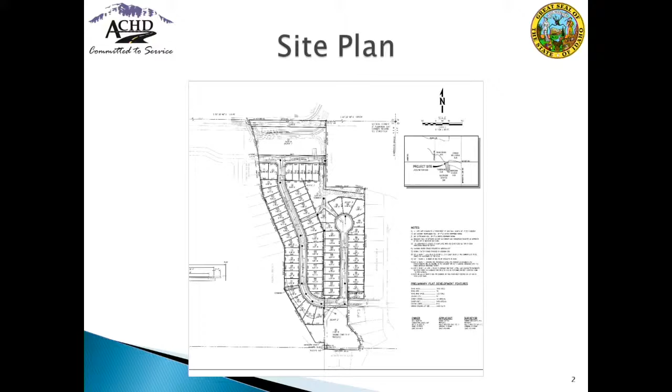Okay, we're up and running. Thank you. Good afternoon, Madam President, Commissioners. For the record, Stacy Yarrington, Development Services. This is a decision briefing, as the applicant has initiated an appeal of staff's decision. This application is for a preliminary plat consisting of 67 buildable lots, estimated to generate 633 average daily trips, with 67 trips in the PM peak hour. The proposed Jocelyn Park subdivision is located south of Victory Road and west of Meridian Road, State Highway 69.

This site has approximately 455 feet of frontage on Victory Road. Victory Road is a minor arterial and is improved with 2 travel lanes, 3-foot wide gravel shoulders, and the Ridenbaugh Canal is located along the site's north boundary and adjacent to Victory Road. Sorry, my glasses are fogging up.

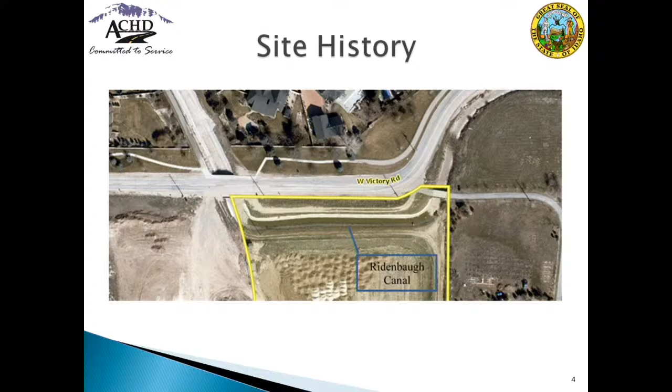The applicant is appealing the staff level decision to require the construction of sidewalk on Victory Road abutting the site, and submitted their request to appeal staff's decision within the allowed 10 working day filing period. ACHD policy requires frontage improvements on Victory Road adjacent to the site that includes pavement widening to 17 feet from center line, plus 3-foot wide gravel shoulder, and the construction of 5-foot wide detached sidewalks on a minor arterial roadway.

The applicant's submittal letter suggests that due to very site-specific conditions, including the bend of Victory Road, elevation change in Victory Road along this frontage, as well as the elevated Ridenbaugh Canal bank, the safest solution for pedestrian access in this area is to have pedestrians cross Victory Road at the new entrance at the Timberline Subdivision directly west of the site, so that pedestrians can access the detached pathway on the north side of Victory, which provides significantly more safety for all.

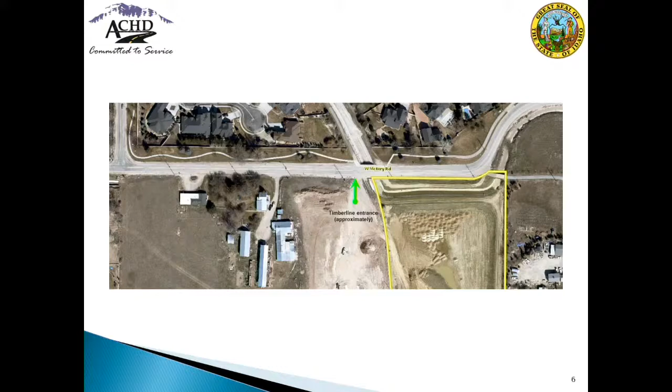As part of ACHD's 2014 action on Victory Middle School, the lack of sidewalk on this segment of Victory Road was raised as a concern. This site is located within the West Ada School District's 1.5-mile walk zone for middle schools and is located approximately 3/4 of a mile from the site.

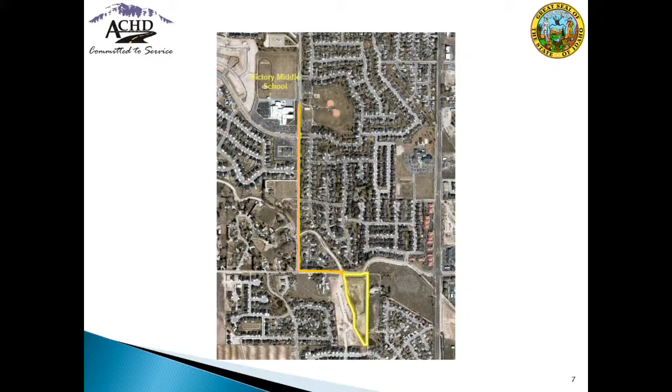At the time of ACHD's action on the middle school application, there was little development occurring on the south side of Victory Road between Linder and Meridian Road. However, since that time, the City of Meridian has extended utilities in this area and has had multiple development applications which have either constructed sidewalks or are in the process of constructing sidewalks on Victory Road. If the waiver of sidewalk is granted for the Jocelyn Park project, there would be a 455-foot wide gap in what would otherwise be almost a complete mile of sidewalk between Linder and Meridian Road.

The applicant's appeal letter stated that this section of the canal— Madam President? Sorry, Stacy. Excuse me, Stacy. Commissioner Baker? Could you go back, please, to the previous slide?

Okay, so the purple indicates existing sidewalk? It is either existing or is currently being constructed. And then the black to the right? Yeah, it's kind of black-green to the right. We've had an application that we've acted on that has a condition to provide sidewalk through their site. So it is a future development to come in. Okay, thank you.

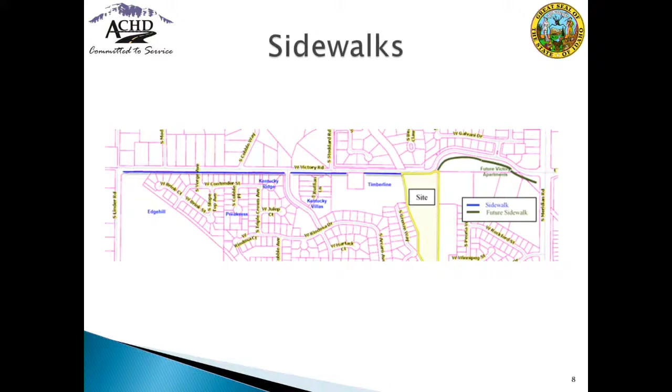Thank you, Stacy. Go ahead. You bet.

So I'll start. The applicant's appeal letter stated that this section of the canal is elevated and therefore standard location and placement of the sidewalk would impact the structural integrity of the canal bank. The plat condition in the staff report required that the sidewalk be located a minimum of 31 feet from center line of Victory Road, abutting the site, consistent with district policy.

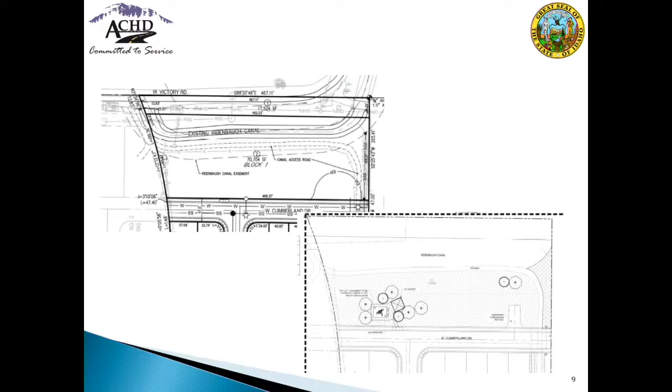The applicant approached the Nampa Meridian Irrigation District to locate the sidewalk within their easement. However, the irrigation board denied the applicant's request. There are viable options to allow for sidewalk to be constructed on the south side of the Ridenbaugh Canal, similar to what has been required on McMillan, west of Locust Grove Road, on Lanewood, north of Floating Feather Road, and on Pollard, north of Floating Feather Road. These roadways have sidewalks constructed behind the canals with pedestrian crossings to tie into adjacent and future pedestrian facilities.

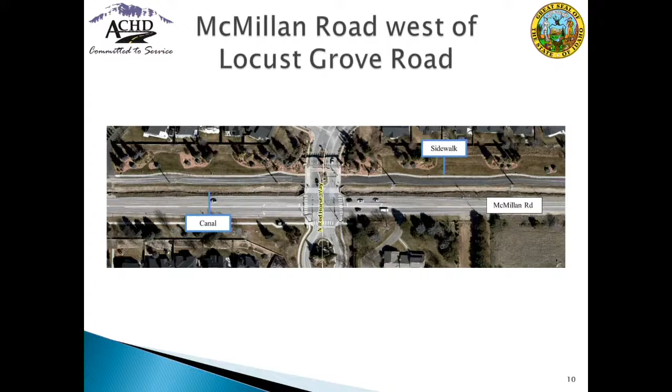This application was heard by the Meridian City Council on September 15, 2020, and during that hearing, the applicant requested a waiver of the city's condition to construct sidewalk on Victory Road abutting their site. City staff recommended the construction of the sidewalk in accordance with the city's subdivision and zoning ordinances. The City Council recognized the importance of having pedestrian facilities in this area and tabled a decision on the application until October 20th to allow time for ACHD to take action on the applicant's appeal.

If improvements are not required with this development, then ACHD will be responsible for the cost of these improvements in the future. In discussions, the applicant was amenable to providing a road trust deposit for sidewalk on Victory Road. However, Victory Road is not scheduled in the integrated 5-year work plan and is listed in the 2020 CIP to be improved between 2031 and 2035. Road trust deposits may only be held by ACHD for 10 years, and if the improvements are not constructed, the funds are returned along with interest to the developer.

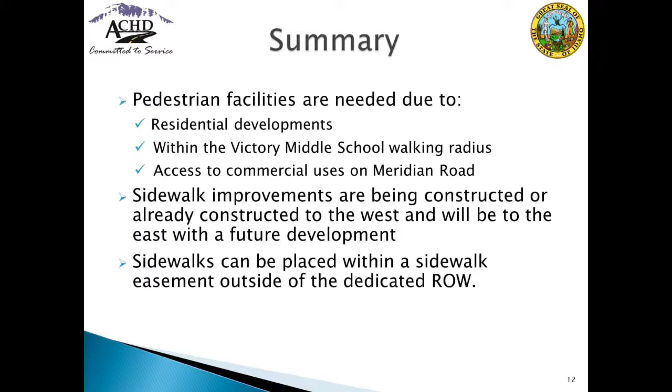Staff is not supportive of the waiver of sidewalk on Victory Road because of the need for pedestrian facilities due to residential developments, the Victory Middle School, and existing commercial uses along Meridian Road. Sidewalk improvements are being constructed directly west of the site and to the east with future development of that site. Thus, it would create a gap along this section of Victory Road, and sidewalks can be placed within a sidewalk easement outside of the dedicated right-of-way. Staff recommends approval of the staff report as written, requiring the construction of the 5-foot wide detached sidewalk per policy. And I stand for any questions.

Madam President. All right, thank you very much. Commissioner Goldthorpe. Yes, I just have a comment for Stacy and for the development services staff that worked on this. And that's just thank you. Thank you for not creating another sidewalk gap in this county. That's all.

Thank you, Commissioner Goldthorpe. Any other comments or questions for Stacy, Commissioners? Madam President, I have a question. All right, Commissioner Hansen. Yeah, thanks, Stacy.

What are the lane widths driving along that, especially heading eastbound? What are the lane widths of the 2 lanes of traffic right now, and what they will be once the pavement's finished after this widening? President May, Commissioner Hansen, currently there's about 24 to 25 feet of pavement there, so the 2 travel lanes are at least 12 feet wide right now. The applicant will have to widen their side of the pavement to 17 feet from center line, and then the MSM plans for a 3-lane roadway through that section in the future.

Well, that was my question. Is 3 lanes really necessary if there's no place to turn? So it's not really a turning lane because there's no place to turn until you get to that development a little further down.

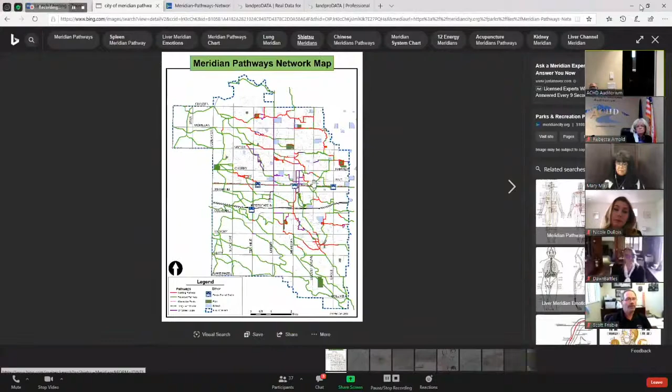And as you see, this bend in the road and the concerns. So initially when we did the project and in the planning process, we said, okay, let's get... we're connecting through the adjacent site. Pardon me, let me get to my info. I apologize, my share screen keeps jumping up in front of me here.

As you can see from the image on the screen, this is the Timberline subdivision that we're taking access from. Our access is actually off of Victory through this entrance here. I did want to note that in one of the previous images Stacy presented, it looked like the arrow was showing access would be here, but it's actually shifted farther to the west.

As you're aware, the requirements are to have frontage improvements. That being said, this image, which I have included in our request, shows that if we were to place the sidewalk where it's typically required, we would be cutting into the bank of the canal. This dashed line is the toe of the bank.

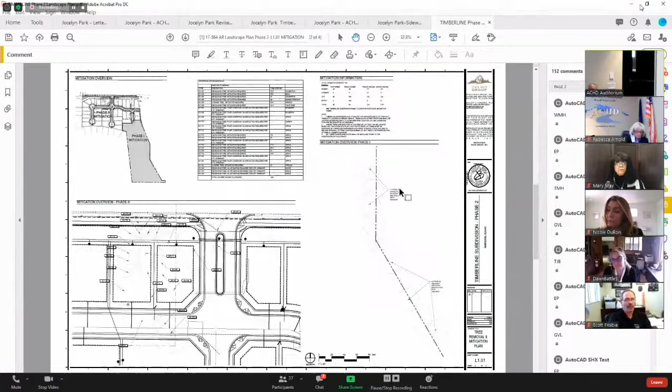We could potentially put the pathway along here in our park, outside of the toe of the bank. Here's a public park area we have that could continue through for maybe some future connection. But that being said, looking at what Timberline's subdivision had been approved to do, we'd still be connecting to a lot. So we've been going round and round on what the different options are.

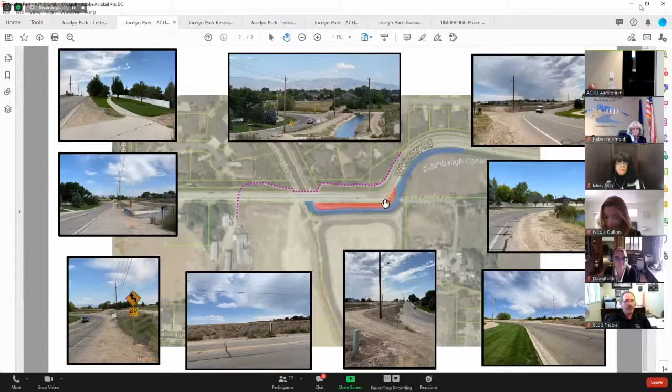This is the area in question, kind of a critical zone. I met with the irrigation district, and they said they see tire marks up on this bank all the time. They felt like they did not want to see pedestrians coming here, and then where do they go? I know Stacy mentioned that the property to the east was to be developed - it's my understanding from city staff that application has now been pulled.

So in looking at how do we make a safe pedestrian access and what options are available, Stacy mentioned our clients have no problem agreeing to a road trust, but it sounds like timing isn't in the cards for that.

We've looked at the city planning for the pathway. They show that the pathway on the north side of Victory is existing. There's a section here that's a little smaller with the sidewalk, and then there's the path that goes up. But there's nothing in their pathway system that identifies anything on the south side of Victory either.

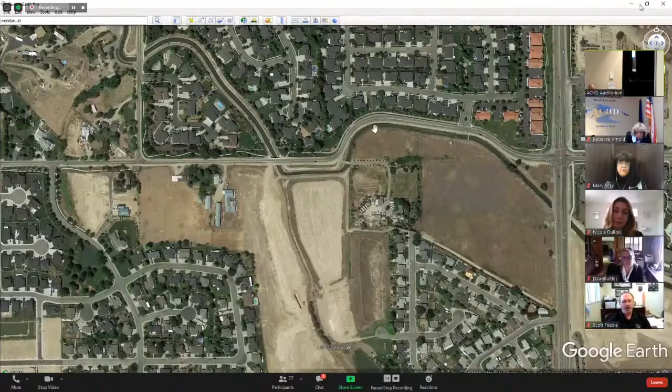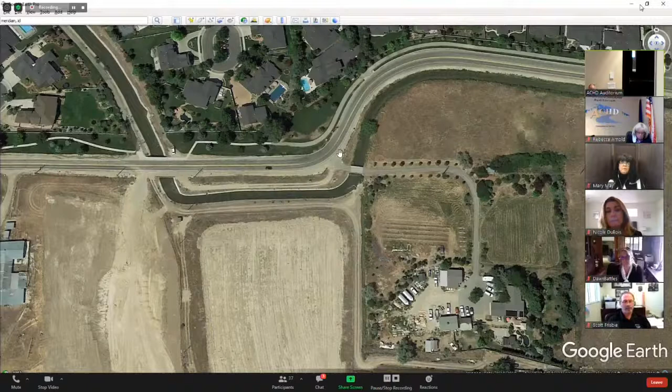And so not controlling this piece, where there's no room, again once you get to this corner, where would they go? Then they get to the end of a sidewalk and they're crossing at a low point that's a blind - potentially not quite a blind corner, but a pretty dangerous corner.

If I may, I'm going to play a video that our client shot of the condition, taking pictures and trying to illustrate our concerns here.

Basically, from our standpoint, we're not allowed to put the sidewalks along the frontage - the irrigation district has said absolutely not. So that doesn't really leave us an option; we don't have any control over that. We appreciate that ACHD staff has been trying to work with us to come up with a solution, but it seems like we keep just going around in circles.

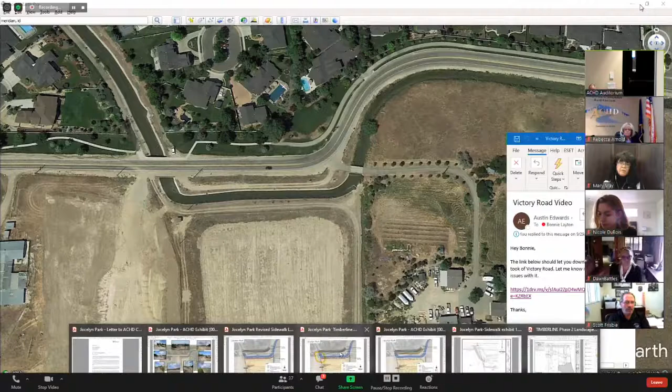While that video loads, I wanted to also show you what we had proposed. Why don't we shift this where there's no drop down here, so why not cross here and really maximize the use of infrastructure that's already in place, pedestrian infrastructure that's maybe underutilized.

I didn't see anybody walking out on this side, but it's off of a busy road. It's not near an attractive nuisance. I'm sorry, the video's taking a while to load, but you can see from the pictures here, as you're coming from the top, you get down into this low corner.

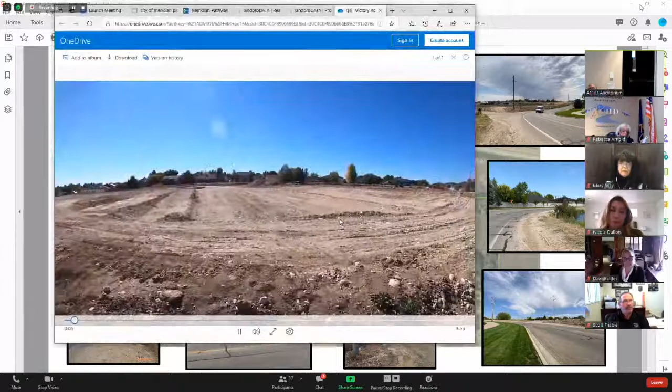Okay, the video's loaded again. So this is the Timberline sub that's being developed. It's looking north on Victory. Now we're looking to the east. Let me try to turn this video down a bit.

But here's where the entrance would be, and then as you go down, you're going down into this low corner. So you'd be pinning, even if we could do it outside of the toe of the slope, which I don't think is possible, you're really forcing pedestrians into a dangerous corner there.

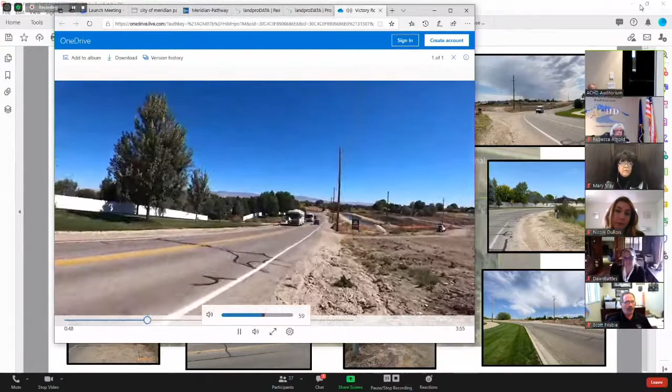And as you may be aware, the traffic on this road is constant. If I'm a mom walking her kids or a stroller down the sidewalk here, and I get to that corner, then what do I do? I've got to turn around. There's no safe place for me to go. When I went out there, I took some pictures, and it was exactly that.

So we asked the irrigation district, can we do something on the top of the bank? We offered to fence it, make it safe. The answer was no. So we're really struggling with what kind of alternative we can provide. If we don't come up with a solution, you'll effectively have a gap in the sidewalk on this side forever, until the canal is realigned and the road is realigned, and there's no plans that I'm aware of that that's going to happen anytime soon.

And that's where we felt like enhancing and encouraging pedestrians to cross at the Timberline entrance would be the safest option for both pedestrians and drivers, something that's clear visibility, that we can get them to the north side, to this wide path that's safe. At the end of the day, the goal is to move pedestrians in a safe manner.

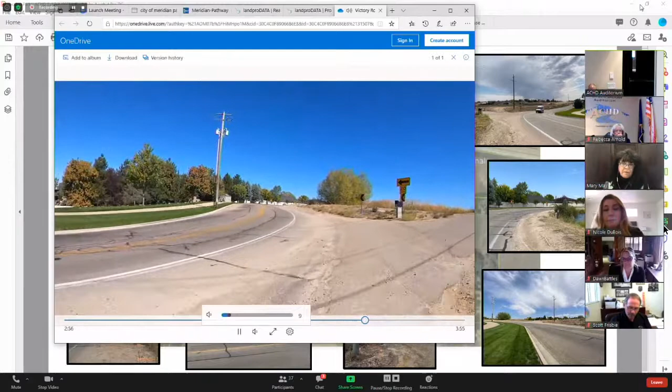I'll just let the video play here. City Council recognized that there was an issue, and they recognized the concerns. We understand, both from city staff standpoint and from ACHD staff standpoint, that they have to follow the procedures of the manual. This is why we're requesting a waiver.

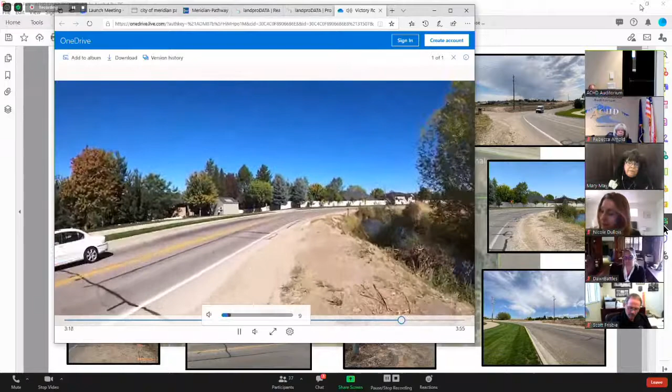So now we're off of our property, and really there's no room here to continue a sidewalk on the north side along the canal. And I guess it's my understanding, Stacy can correct me if I'm wrong, but that previous application to the east of us that's now been pulled, they were going to have a path on the south side, not even adjacent to the road, because there's just no room there with the canal.

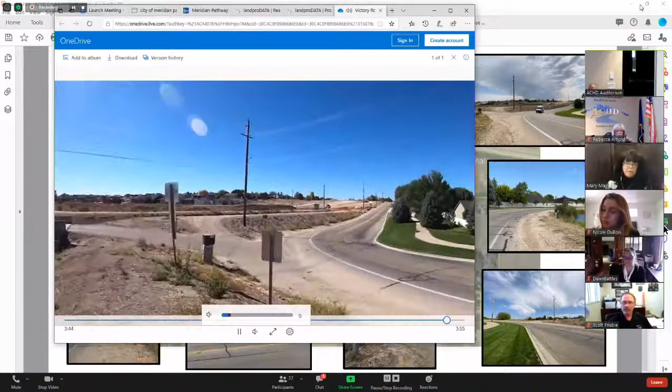So we think that our request meets the standards of a waiver or a variance, given that there's very site-specific constraints and topography here. You can see that the elevation change here from the top of the bank down, you're really in this low corner. And crossing up top, where there's good visibility, where people can get across safely and onto this very nice, beautiful piece of infrastructure, pedestrian infrastructure, would be the best way to go.

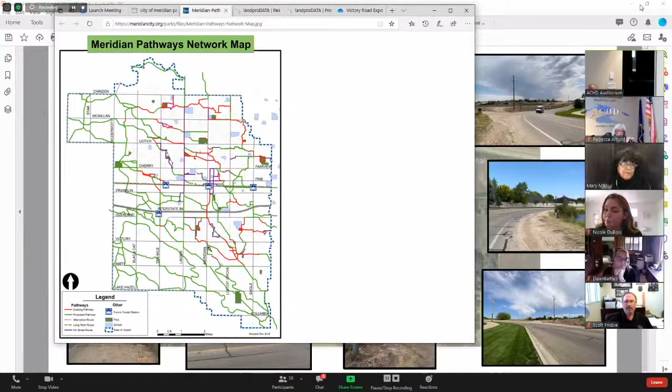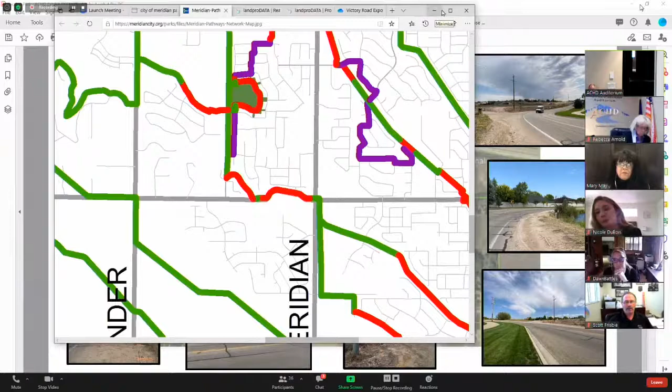It's a very terrible connection. Yeah. I'm sorry, could you repeat that, please? Yeah, maybe you should mute your phone. Yeah, Bonnie, can you mute while she asks her question, please? We're getting a lot of kickback.

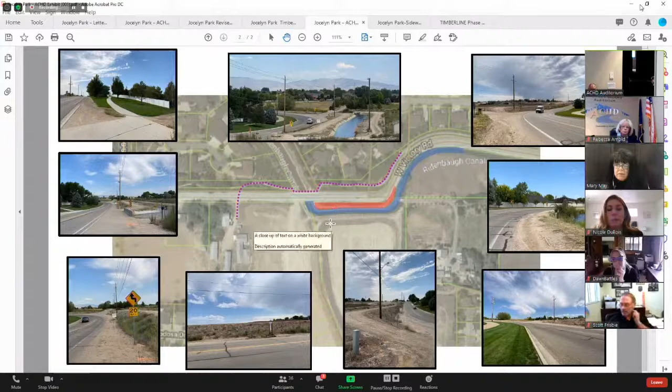Okay, so what's the downside to putting the pathway on the south side of the canal? The downside would be that we would not be able to, we'd have to be outside of the irrigation district's easements. They've been very clear that they don't want anything there. So it would require that we put it here in our proposed park. That said, there would be no way to get to it. Well, you had a thing up earlier that showed you could link to the road, right?

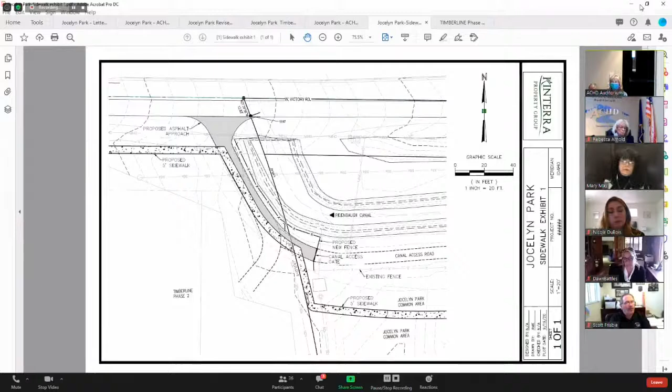No, that's incorrect. What we did was a study trying to show, but it's not on our property. There is a road that you're stepping into, correct? Yes, that is correct.

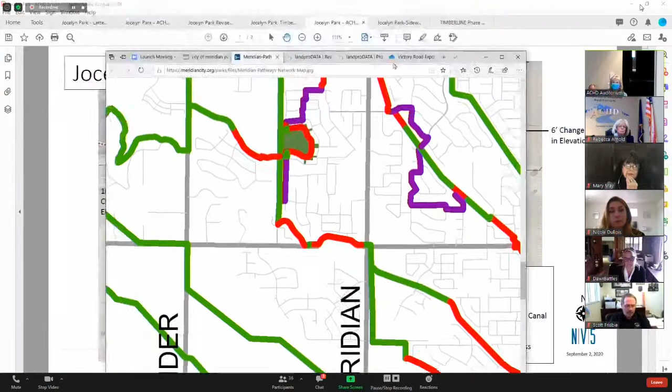Let me get to what we had been proposing. So you have that there. I understand the issue with not being able to be along Victory, but you could connect a pathway from that stub street going north along the edge of the right-of-way for the canal, and then have it stub out to the east of your property.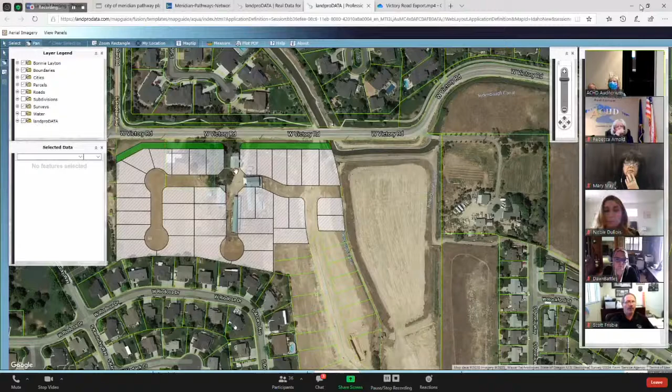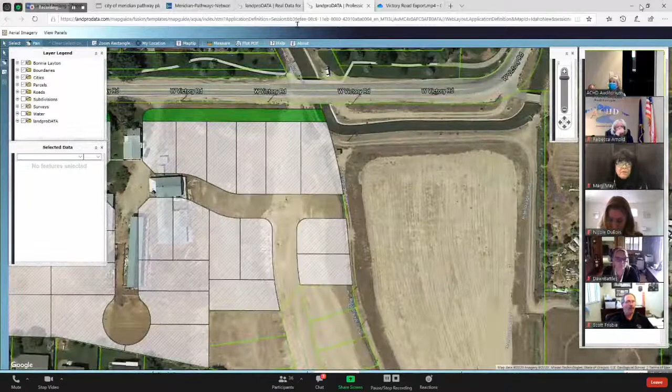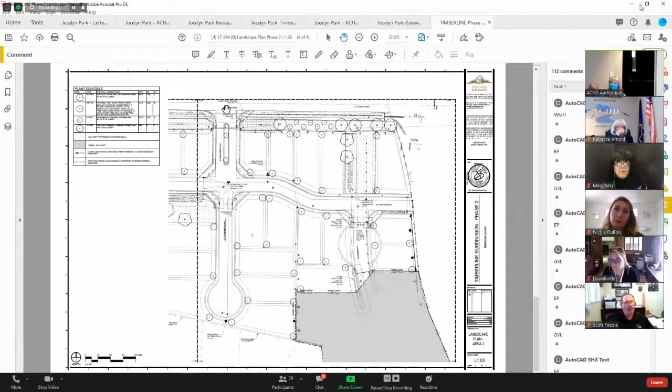Are you speaking from here? That pathway's probably, that sidewalk's already been created, I'm sure. Yes, but let me get to that drawing. So the plan is, here's the entrance, here's the sidewalk. What we have proposed is, why not use this sidewalk and stub in, and then we can bring it along our path. That's what we've been proposing all along, can't we just take access off of that?

Well, I'm just getting from your discussion, I believe it's more a question of not wanting to do any... okay, I don't know if anybody can hear this or not. There's just so much feedback. So that's okay, never mind, I don't need to ask.

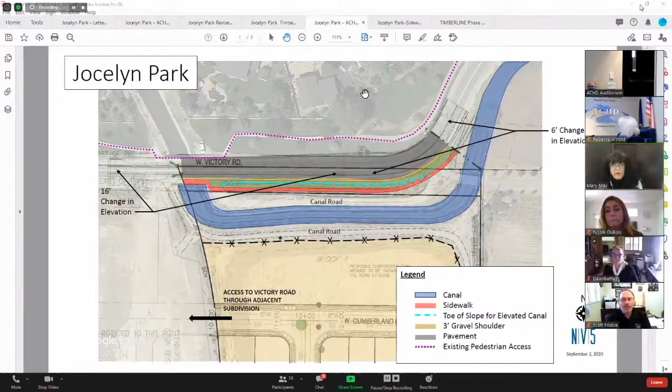Yes, great. My name is Austin Edwards. I gave Stacy my address, but it's 2573 Long Wing, Suite 210, Meridian, 83642, just for the record. I'm on the developer side, and I wanted to say thank you for hearing us today, and I wanted to reiterate and state clearly what our intention is here. We firmly understand the need for connectivity through this area, the need for sidewalk and pathway access, and we absolutely want to provide that connectivity.

I believe that with the access off of Victory Road through Timberline, we can get pedestrians off of this dangerous stretch of Victory Road, funnel them down Cumberland Drive on our frontage where we have a nice open space. We're happy to take a pathway off of that sidewalk and run it down the southern edge of the canal right-of-way, the Ridenbaugh Canal, and stub it at the edge of our property for future expansion on the south side of the canal. I think this area could serve as a great transition for getting traffic off of Victory Road and to the south side of the canal for future expansion towards Meridian. So that's kind of our plan.

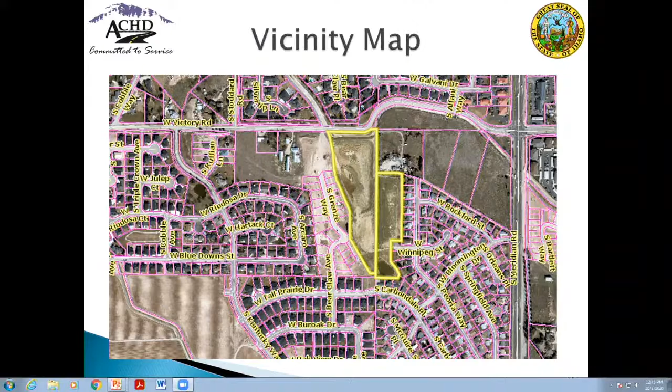Could we pull up that picture that Commissioner Hanson is looking at of the bridge so everybody has it before them? I'm just referring right now to the path on the north side, but we'll face the same issue if we require a pathway on the south side. See, it comes directly to the road and then detaches again right there. So regardless of what we do on this application, I'd like to see us move forward on putting some Jersey barriers or some sort of physical protection on that pathway. We're lucky we haven't had an incident so far.

President May, Mr. Inselman, Commissioner Hanson, something? We will look at that. Thank you very much for bringing that to our attention, Commissioner Hanson. Thank you, Mr. Inselman. All right, Commissioners, any other comments, statements, questions?

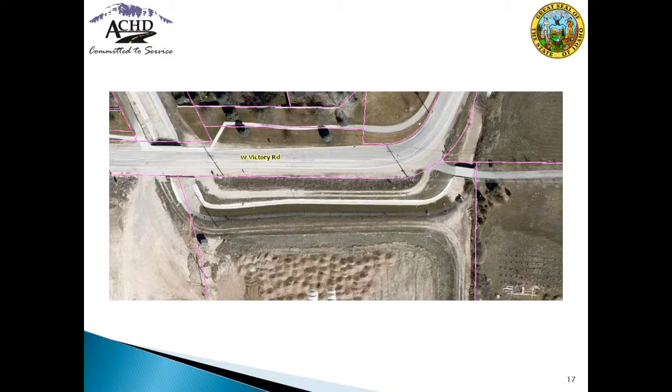All right, we have before us, and you heard the viable option that would satisfy the criteria before us. Madam President, Commissioner Goldthorpe. I would like to make a motion, and that is that we approve the staff report as written and deny the waiver. I'll second that. All right, we have a motion with a second.

Any further discussion? Actually, Madam President, I think the motion should probably be structured as we are denying the appeal and upholding the staff report as written. Agreed. Okay, the motioner agrees. So we have a motion and a second. Any further discussion, Madam President?

Commissioner Goldthorpe? I take great interest in the activities of the irrigation district and their board votes. What has been said about their reluctance or refusal to do anything like this is often a 2 to 1 vote. So I would ask that perhaps in the future the developer and others might pay attention more to the irrigation district than expecting either the city or ACHD to solve problems like this that involve a pathway that will absolutely not be seen by the public, and they'll be more confused than ever to use something that was on the other side of the canal and at the north end of a, quote, park. So again, that's something to consider.

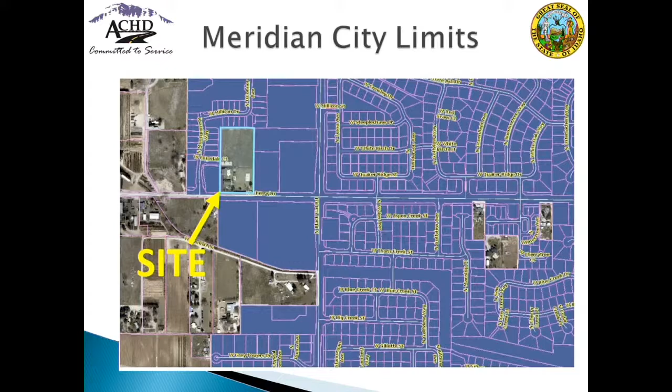The site is located north of Cherry Lane and west of Black Cat Road, between two entitled residential subdivisions within the City of Meridian. This development is estimated to generate 390 vehicle trips per day, with 25 trips in the PM peak hour. The applicant is requesting approval for a master site plan and conditional use permit for a Montessori preschool child care center including 4 separate buildings totaling 3,840 square feet on the southwestern portion of a 5-acre parcel.

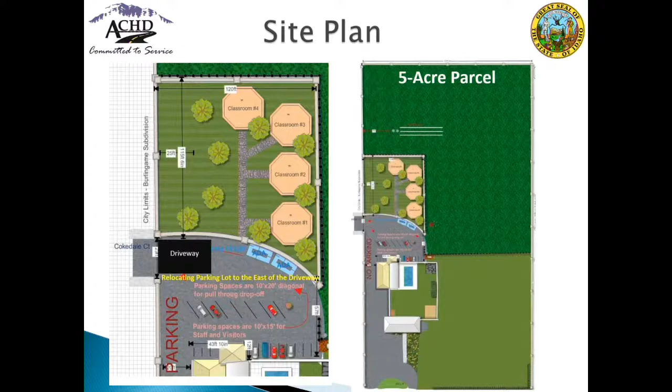The preschool child care center will be expanded in a later phase to include elementary grades, consisting of up to 24 students in each of the 4 proposed buildings, for a total of 96 students at full capacity.

There was a previous application for this site. In 2018, the applicant applied for an accessory use permit with Ada County Development Services for an in-home group daycare facility with up to 12 children. Staff recommended a waiver of frontage improvements in exchange for dedication of right-of-way without compensation. The staff report also stated frontage improvements may be required on Cherry Lane with a future development application. The ACHD Commission approved staff's recommendation to waive frontage improvements with that application.

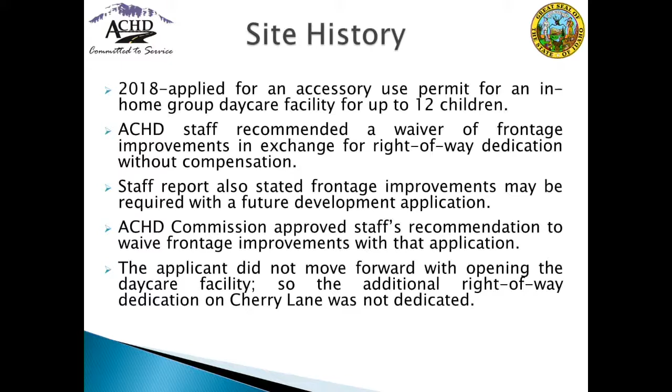The applicant did not move forward with opening the in-home daycare facility, so the additional right-of-way on Cherry Lane was not dedicated abutting the site. The applicant has agreed to dedicate the additional right-of-way as part of this application without compensation, as this portion of Cherry Lane is not listed in the capital improvements plan. Staff recommends the applicant enter into a license agreement with ACHD allowing the existing well and any landscaping to remain until further development of the site.

The applicant is requesting a waiver of the frontage improvements policy as part of the current application. Those requirements include pavement widening to 17 feet from center line plus a 3-foot gravel shoulder where it does not exist, for approximately 125 feet of the site's frontage, and a 5-foot wide sidewalk on Cherry Lane abutting the site.

The applicant's waiver request is based on the following: the applicant personally measured and states there is 17 feet of pavement and a minimum 3-foot gravel shoulder existing along the site's frontage, the inability to use their accessory use permit with Ada County Development Services approved in 2018, and the undue hardship of the conditions of approval to construct a 960 square foot building in their first phase.

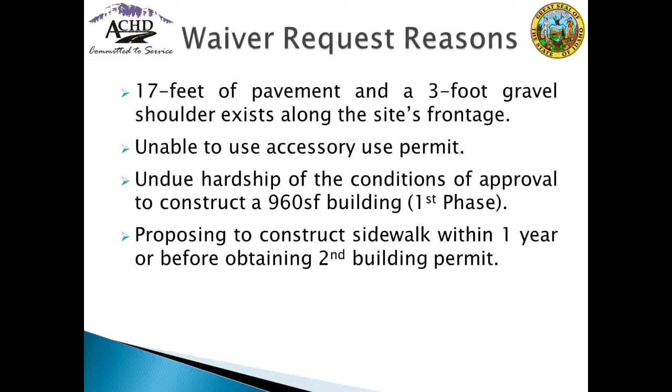Additionally, the applicant is proposing to construct sidewalk within 1 year after the first building is constructed, or before applying for a building permit to construct the second 960 square foot building.

ACHD staff took measurements along Cherry Lane and recommends a waiver of pavement widening and a 3-foot gravel shoulder abutting the site, due to the existing conditions meeting the intent of the policy for pavement width and a shoulder. However, staff is not supportive of the waiver of sidewalk.

If Ada County Development Services approves this application, it will be approved for all 4 buildings. Therefore, ACHD will not receive another development application to require sidewalk.

Both parcels east and west of the site have been entitled as residential subdivisions within the city of Meridian and were required to construct sidewalk. The sidewalk is existing abutting the site's west property line and will be constructed abutting the east property line, thus creating a 335-foot wide sidewalk gap along Cherry Lane.

Because of the continuous development in the area, there is a need for pedestrian facilities to provide access to the proposed school site, the churches in proximity, and the elementary school within 1.3 miles of the site.

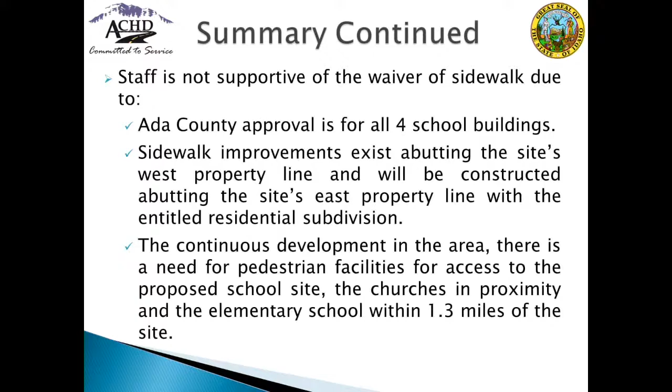Staff recommends approval of the staff report as written, requiring the construction of a 5-foot wide detached sidewalk on Cherry Lane abutting the site. I will stand for any questions.

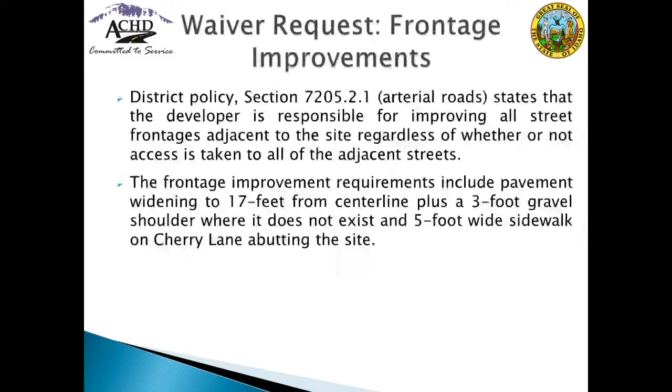Commissioner, may I ask if he would be testifying? I have not heard a response. Sorry, Mr. McEwen, is that better? Hello? There we go. Okay, there he is, that's much better, all right. Yes, we had to change our audio for this meeting.

I would encourage you to read pages 70 and 71 for my response to the report. And we're not asking for a waiver of the sidewalk per se. What we're asking for is a little bit of time.

If you look at the report, you'll notice that we are surrounded somewhat by improvements. The church across us, on the south side, will be required to build a sidewalk. We're asking for a 1-year waiver, which would allow us to get at least one school up and make enough money so that we can tear out our landscaping, remove our well, relocate our landscaping, and put the sidewalk in. It's a matter of funds and dollars and cents.

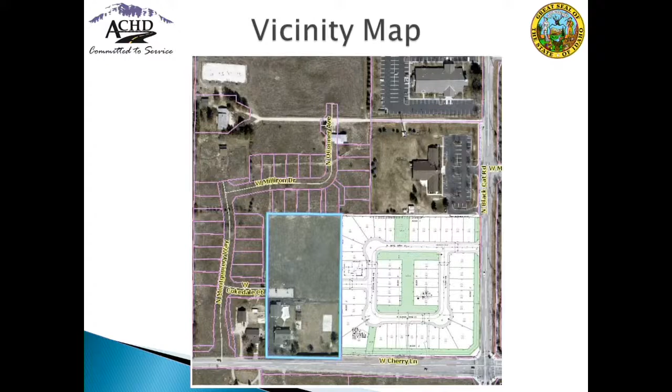My address is 5120 West Cherry Lane. I am Jessie Ellis McEwen. I am the teacher, owner, and headmaster of the school.

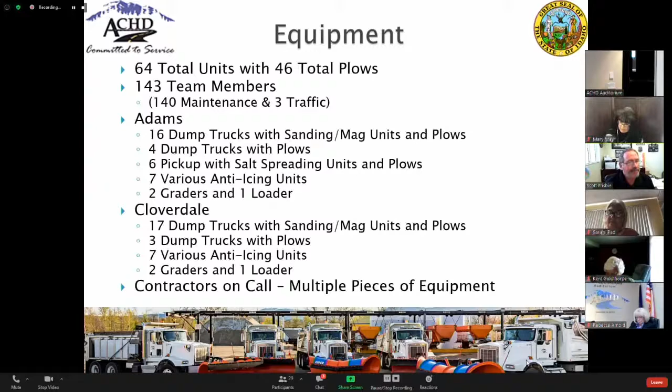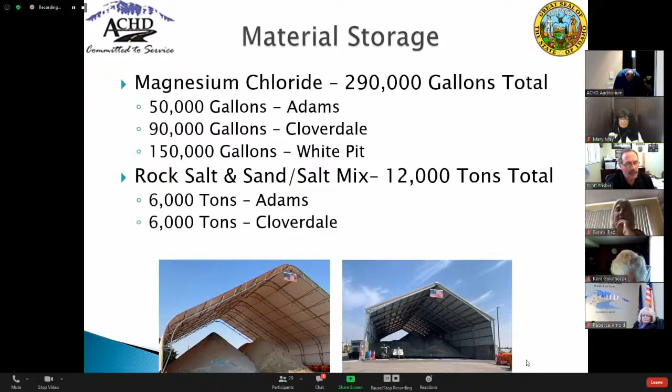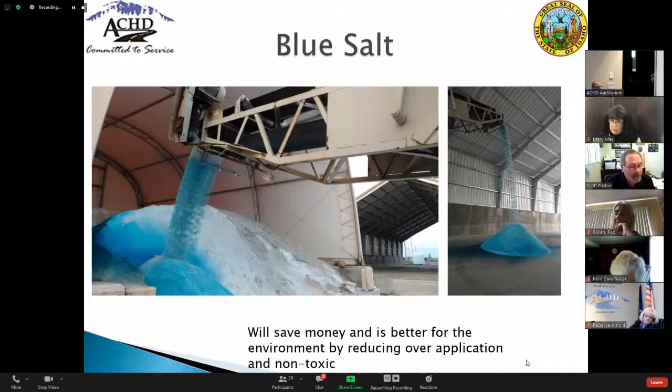Blue salt - this year we will be turning our road salt blue again this season. Doing this will save us money and is better for the environment by reducing over application. Turning it blue also allows our team members to proactively check the spread patterns during the application. This will help limit the over-treating of areas in multiple routes since it shows up easier. It is also non-toxic.

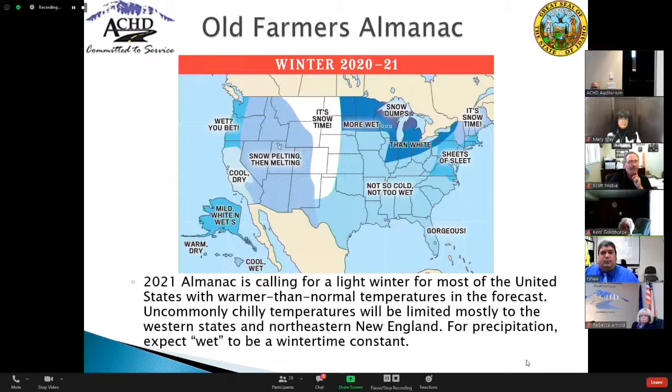Here is some of your favorite stuff, the Old Farmer's Almanac for 2021. It's calling for a light winter for most of the United States. Around here, we're looking for basically a normal winter, whatever that is. You can take that for what it's worth. This is the one we're hanging our hat on, hopefully: a light winter and a normal winter for average snowfall in our area.

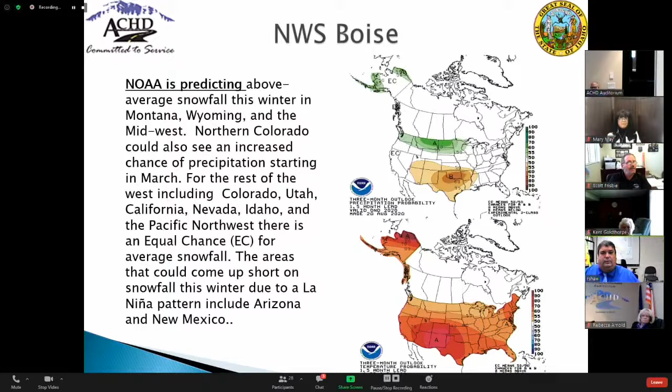But Scott and I will stand for any questions or comments that you may have on our winter maintenance operation. All right, thank you, gentlemen, both of you. The season's coming, and you'll be ready. Any questions, commissioners?

Questions or comments? All right, I guess no comments, no questions. Continue doing the stellar job that you do every year for us. We appreciate all that you do. Please pass that on to all your crews.

Mr. Goldthorpe? I was waiting to see if anybody had a really intelligent question, but I've got a question for Scott. You got your elk yet? No, I go out the 14th, so I'll let you know. Okay, we'll have a follow-up. All right, thank you, thank you, Scott. Thank you, Rich. You betcha. Thank you. You bet. All right.

Next, we will have a pavement management evaluation update presentation by staff. And it looks like we have Mr. Lucas.

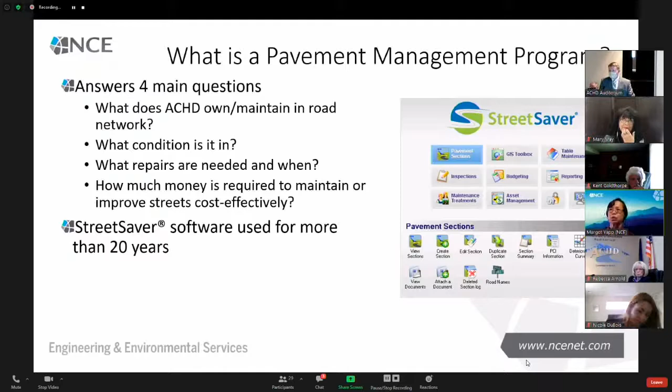So the first thing I always like to start out with is to give everyone a quick sense of how valuable this road network is. You just saw a very similar statistical breakdown that was just presented by Scott and Rich. We've got over almost 2,500 center line miles. We look at it really more in terms of lane miles. It's about almost 5,200 lane miles. And we break it down to arterials, collectors, local roads, and such. As you all know, the arterials are the main streets, and then we have the residential neighborhoods, and then the collectors are the ones that connect in between. We also do have some alleys in the road network that's in the database, but they're a very small percentage.

And this doesn't include the sidewalks, which we just heard about in the previous presentation, or the storm drain system, or the signals, or any of that. This is really just the pavement alone, so it's a significant asset. One of the things we try to do in this program is figure out how much money we need to maintain this asset, because after all, the taxpayers have paid for this. It's incumbent on us to try and maintain it to the best level that we can.

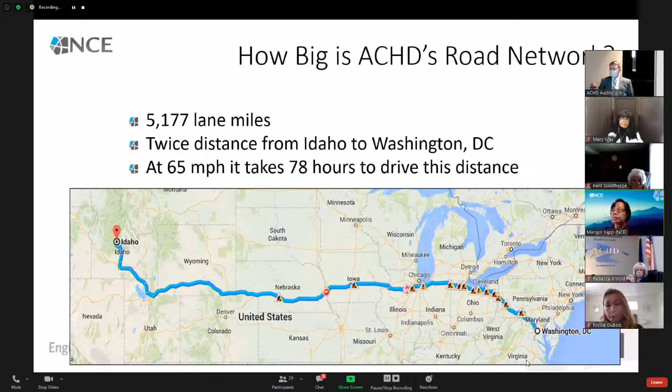So that's the first part of the question: how much do we own and maintain? The next question we ask is, well, is it in good or bad condition? And I think, generally speaking, the district has been very fortunate. You've got a very good staff, and you've got sufficient funding to maintain it.

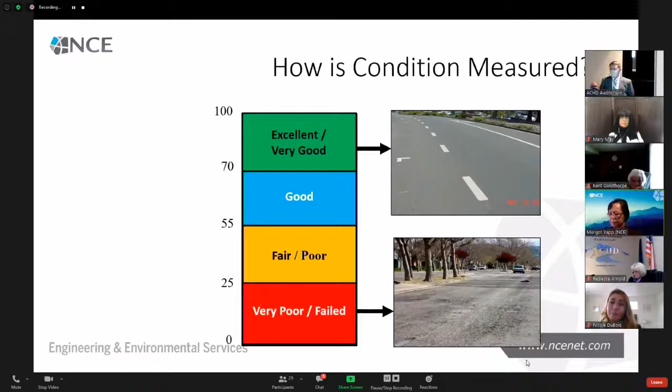One of the ways we measure the condition is through something called the Pavement Condition Index, or the PCI, and it's a scale of 0 to 100. 0 is failed, like cobbles or gravel, and 100 is excellent, like the day after the contractor does their job and it's in good condition. We fall somewhere in between. Where ACHD, the district, falls today is right at 81, which is very close to where we were the last time I did this presentation to you.

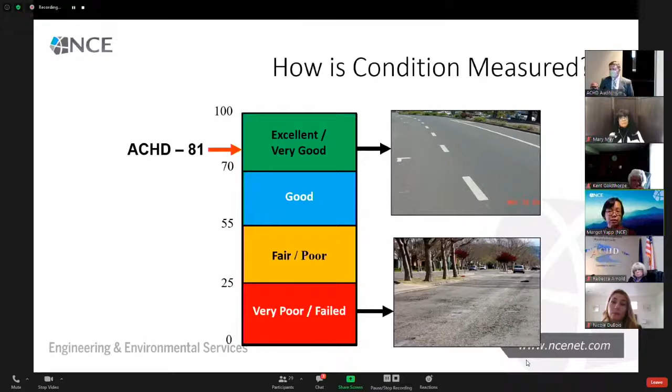And by all measures, this is a very, very good metric. I'm often asked, what is a good number to be at? I can tell you that if you're anywhere in the green category, you're in pretty decent shape. But you need to watch the trends, which is what we're going to show you next.

Because the district is fortunate and you've been able to use the pavement management software for so many years, we were able to go back and look at the historical data. You can see here that pretty much over the last 20 years or so, it's been pretty stable, kind of in the low and mid 80s. That's not bad. I would probably discount the numbers in the 90s, partly because I believe that was probably due to the district just getting started putting information in there, and it may not have been a complete network. It may have been, for instance, just portions that hadn't been completely inspected. So I don't want to look at the 90s, but certainly over the last 20 years, it's fairly stable, fairly solid.

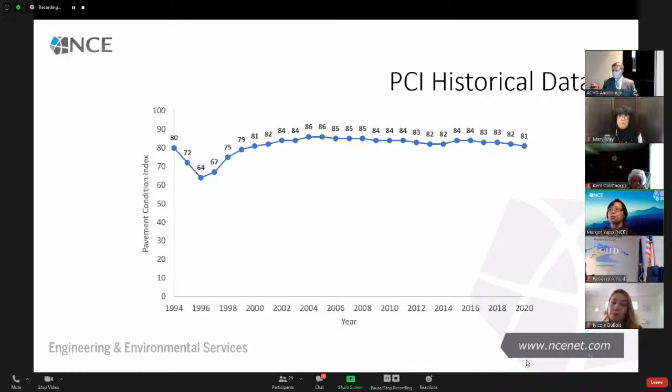But, and there's always a but, if you just look at the last 5 years, you can see there's a very slight, gentle downward trend. I think one of the things we talked about several years ago was be careful, watch out for any potential downward trends, because you have a growing network. So the danger, of course, is that as the network grows, does the funding grow to keep up with the network? We said to just keep an eye on and monitor that.

So let's take the average of 81 and tease it out. What I like to do is look at the numbers on the left-hand side rather than just the average. Your arterials, your collectors, residentials, are solidly in good shape. That's not always the case for many agencies; in fact, we often see the arterials may be in better shape than the local streets. But in this case, the district has taken an approach that looks at the whole network holistically, and you'll be able to keep it there. The one area is the alleys, those are a little bit lower, but you don't have too many of those in the database.

I think it's maybe a couple hundred, which is a very small percentage. Those are low traffic roads. The public doesn't use them very much, it's mostly for trucks loading or unloading. So probably not a big surprise.

If you look at the pie chart on the right-hand side, what we see is that more than 80% of the network is in very good or good shape. This is, I have to tell you, an enviable situation to be in. Not many agencies in the United States are in this place.

But you do have a chunk of roads considered fair, that's the blue category. Another way of thinking of that fair category, I like to think of it as at risk, because we need to pay attention, otherwise it could deteriorate very quickly to the red category. It hasn't yet, but it's something to keep an eye on.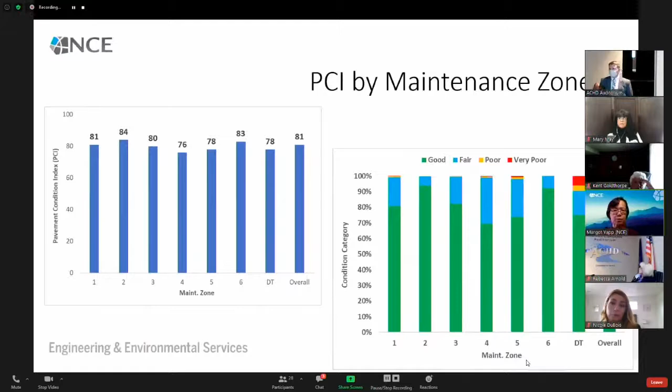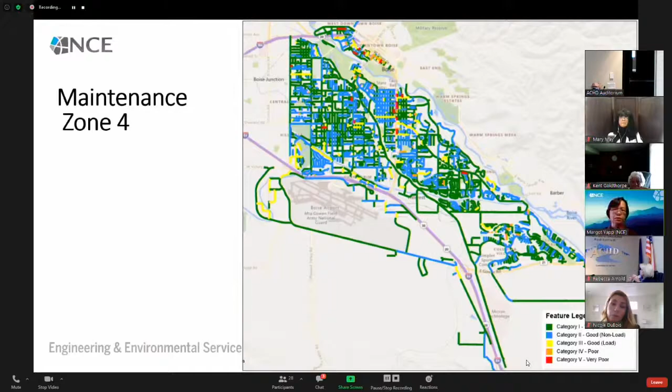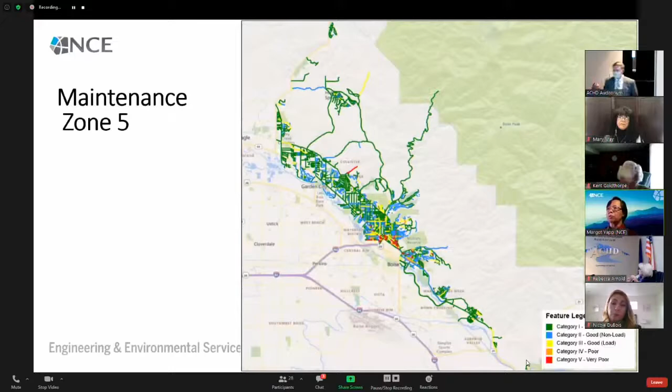Maintenance Zone 4 is probably the one area closer to the more urbanized areas, and now you can see a little bit more pockets of blue in there, something to keep an eye on, and definitely some reds and yellows popping up. Then on the other side of the river, mostly green out in the hills, but definitely in the more urbanized areas, some blues and pockets of blues as well.

And this is the last maintenance zone, same story. So everything I've mentioned so far is pretty good news. So why is it in such good shape?

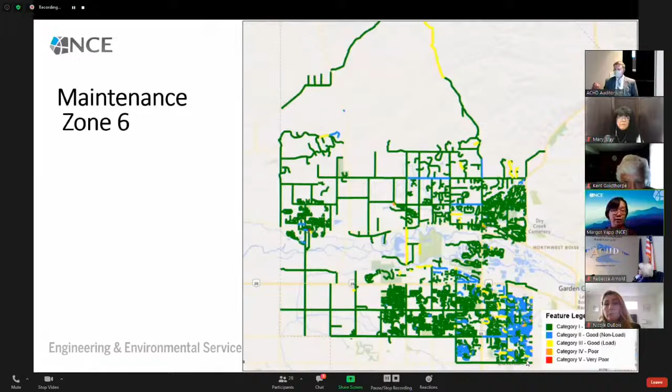Well, if we take a look at the historical maintenance, you can see what the district has been able to do is really look at almost a quarter of the network maintained annually. So every single lane mile within is crack sealed in each zone.

The chip seal program usually fluctuates between 450 to 500 miles a year, covering a lot of territory. It's one of the most cost-effective treatments. I like chip seals an awful lot, but you do have some bad roads, and those cost a lot of money to overlay and reconstruct. There's a little sliver of red there—that's about 60 lane miles every year.

Now, the part I wanted to bring up is that your network is growing. You're adding population, more subdivisions are being built, and more roads have to be built to service them. It's part of the process for all transportation districts.

But the key, I think, is that people sometimes forget: it's easy to add roads, but it's not so easy to add the funding to maintain the new roads. Keep an eye on this—you've had a 10% increase in mileage since 2013, about 500 lane miles. That's a lot, like a small city. So if you're adding a small city every 6-7 years or so, is your budget also proportionally increasing to absorb these cities?

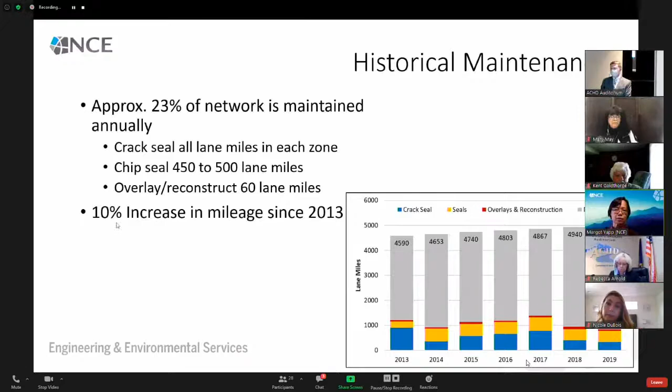I like this slide. It shows that when we talk about how good the road network is in Ada County, we're not just making it up. We took a lot of effort to find similar agencies in the Northwest. The first two bars are Portland and Seattle—they have significantly lower PCIs than Ada County. Even some mountain agencies in Colorado, like Arvada and Arapahoe County, are lower. Coeur d'Alene is the only Idaho agency we found that also uses Street Saver, so it was an easy apples-to-apples comparison, and that's at 68.

The only two counties we found that were a little better than Ada County were Maricopa County in the Phoenix, Arizona area, and Pierce County in Washington. But by and large, Ada County is in good shape, so it's a good way to say congratulations and keep up the good work.

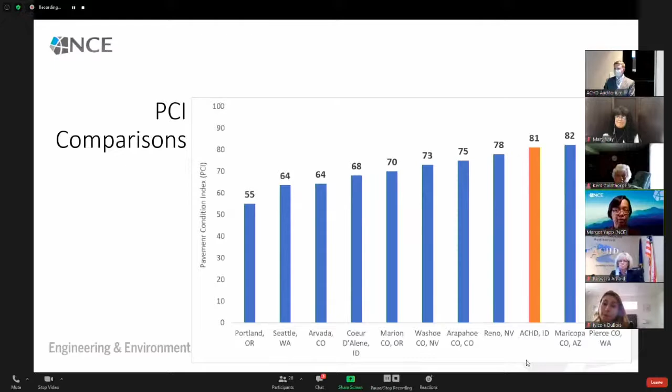So where we are, to wrap up: we've updated the field data on about 470 miles of arterial collectors and an additional 200 miles of residential. That was done this last late summer, and it's all done. We're working with district staff on the maintenance costs and decision trees, and that's pretty much wrapped up too. We're just about ready to start the budget analysis, trying to see if the existing budget is enough to maintain this very large network.

We're also going to try to find ways to stretch that proverbial dollar, looking at the rural roads to see if we can fine-tune some of the treatments applied there versus more urbanized areas. And with that, I'll open it up for questions.

All right, thank you Margot. A lot of good information there. Commissioners, questions for Margot? I have a comment.

Commissioner Goldthorpe: I'm just grateful we continue to do this. I guess I'm going to have to put down my 'we're number one' glove—okay, now we're number three. Oh, I appreciate that we're still doing so well. Absolutely, absolutely. Thank you, Commissioner Goldthorpe.